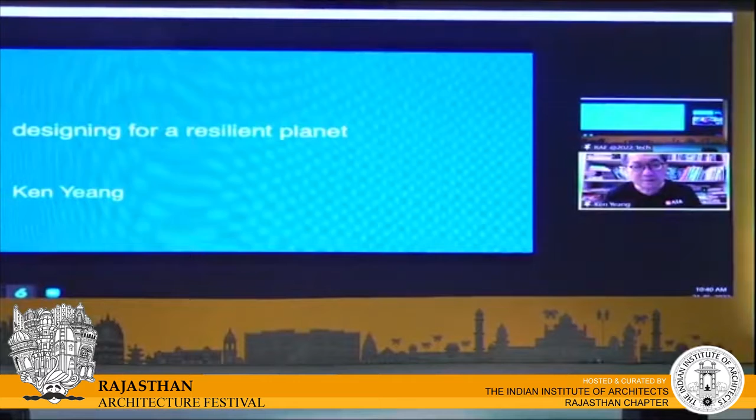Let me just dive into what I'm going to present to you today, which is the topic of designing for a resilient planet. It's such a complex topic that I am not able to do it comprehensively, so most of our work are, if you like, experiments that seek to advance the field of ecological design.

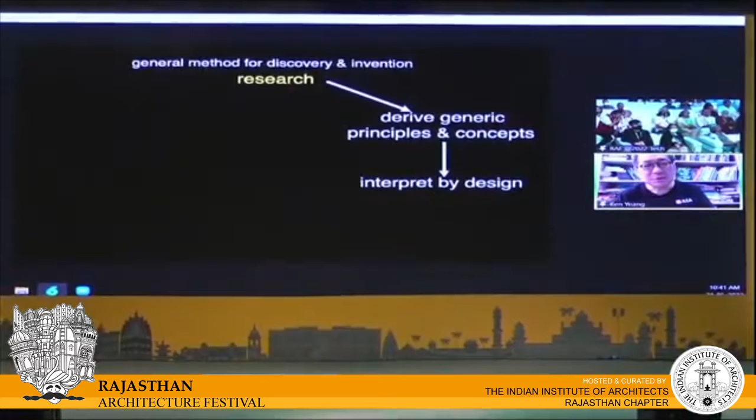This is our general method, what I call discovery invention. Our work is research-based, and from the research we derive generic principles and concepts, which we then try to interpret by design and get it built. From there we evaluate, discover, and advance principles, getting feedback that allows us to further develop generic principles and concepts, which we publish and seek to improve through further research.

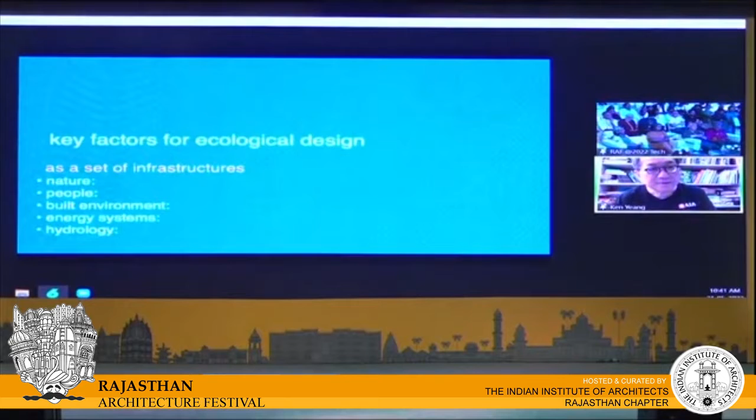The key factors for ecological design, for me, are a set of infrastructures. These infrastructures are fivefold: nature as an infrastructure, people and society as an infrastructure, our built environment as an infrastructure, our energy systems, and the hydrology of the environment. I'll explain why these factors matter in my presentation later on.

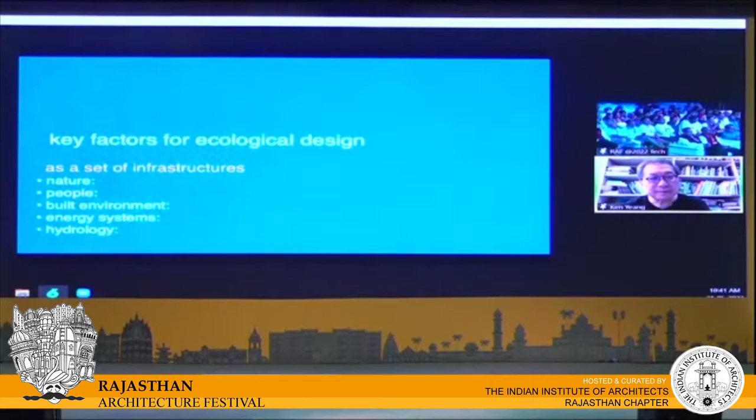And the objectives of each of these are trying to achieve net positive ecological impact, net well-being for society, net zero water, net zero waste and emissions, and renewable energy, net zero carbon.

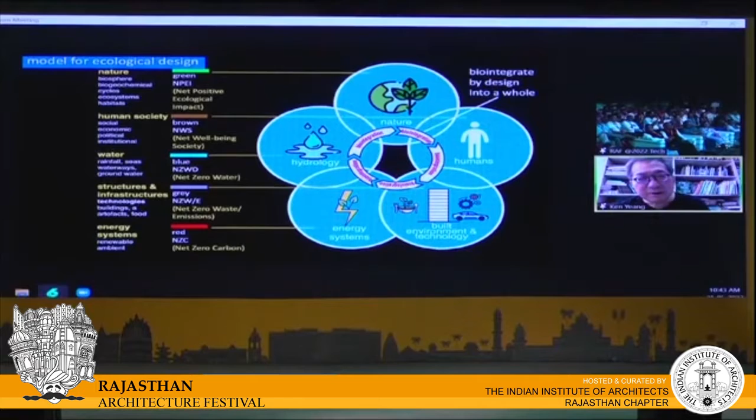The challenge then is how we can bring all these together into a whole. And this is what ecological design is for me. I haven't been able to achieve this 100%, but I try, and it's a continuous experiment and endeavor over our work.

So now the first factor that I want to bring to mind is ecocentricity, which is designing the built environment based on the science of ecology. The reason is that ecology is the baseline context for everything that takes place on the planet.

And because the ecology of the planet is interconnected, we have to start with this as the basis for everything that we do and all our activities on the planet.

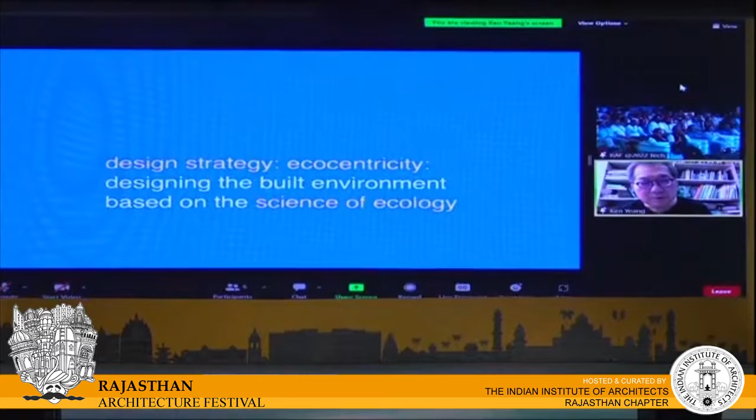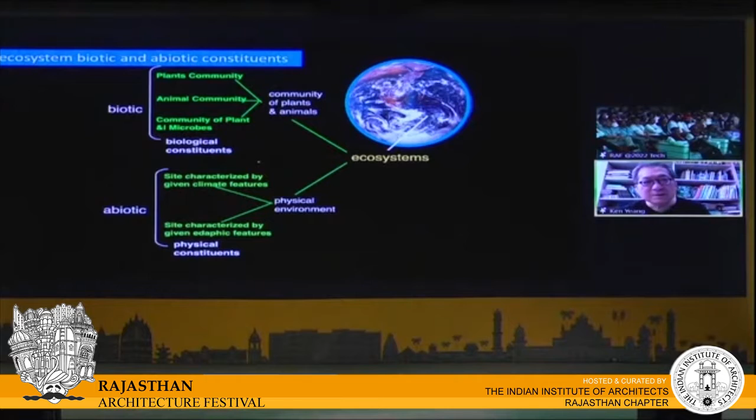Now, ecology sees the Earth as covered by this thin film called the biosphere. And within the biosphere are units in nature which ecologists call ecosystems, consisting of biotic and abiotic constituents, communities of plants, animals, and the physical environment acting together to form a whole.

But to add to this is our human society. Our human society is part of the communities of plants and animals, but we are special, we're different from all species in nature because we are the most powerful of all species.

We can change the landscape, we can change the waterways, we can change the biogeochemical cycles, we can change climate, and now the world is in an environmental crisis, and we don't have very much time to rectify and recover our planet. So it's an urgent endeavor.

Now, of course, if you tell businessmen, you tell the commercial world, they'll say, why should we design ecologically? Why should we design for the planet? Frankly speaking, earnestly speaking, it is extremely difficult to give a commercial justification for ecological design.

And we do it because it is an ethical thing to do. We do it because we have to make sure the planet continues in a good state, in a good condition for future generations. Now, of course, if we don't, then our human society may not be able to perpetually continue.

But nature doesn't care. Nature says, you human beings, you kill yourself, you hurt yourself, but we'll continue, we will recover over time. But why do we need to design ecologically? We have to design ecologically because we want to continue and be sustainable.

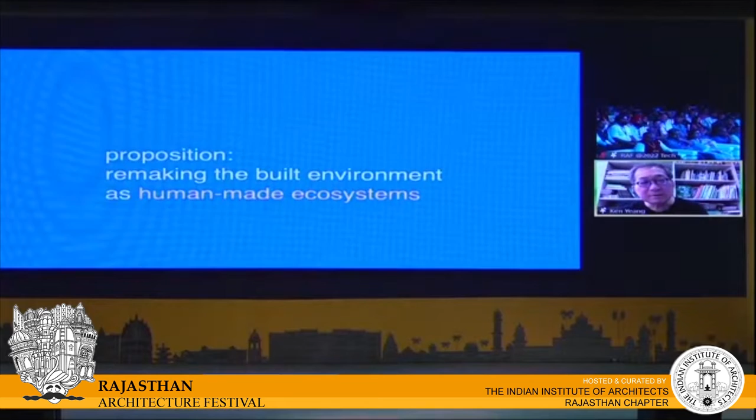This is at a crisis. And so the proposition that I want to present to you today, and this is the single most important idea, is that we need to remake our built environment as human-made ecosystems so that it biointegrates seamlessly and benignly with the natural environment. And so that's our physical environment.

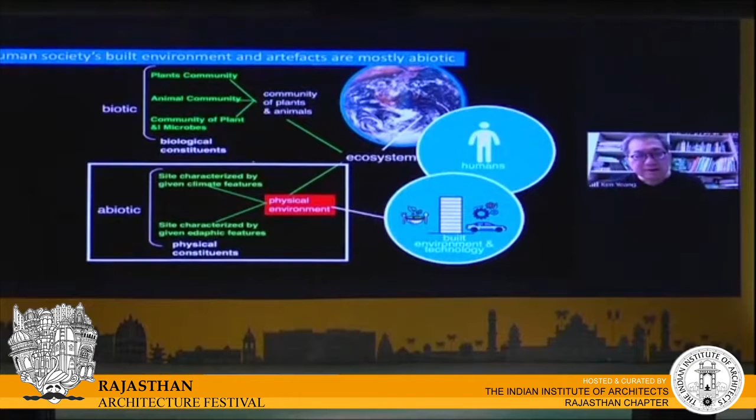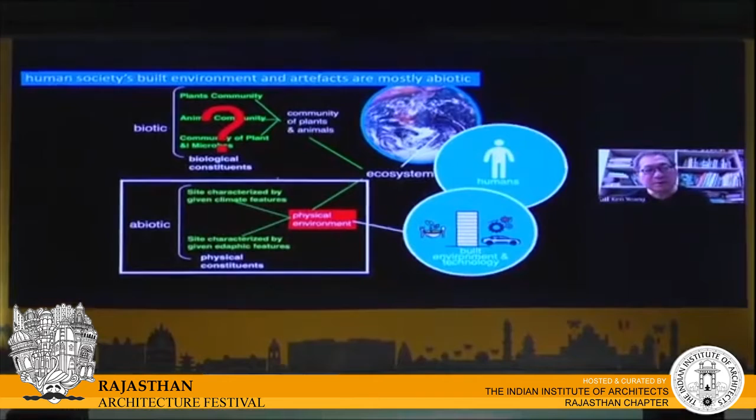Then I started to think, when I first started in this field, that actually our built environment, that everything we make is physical, almost physical, because of course there's landscaping and there's agriculture and there's forestry. And if you look into our built environment, if you look around the room that you're in right now, where are the biotic constituents? The only biotic constituents are you and the bugs in the room.

And so the idea was, can we remake the built environment as human-made ecosystems? And to try and seek to do that, we need to practice what I call eco-mimicry. We have to remake the built environment as human-made ecosystems through emulating, replicating, and augmenting the built environment with nature.

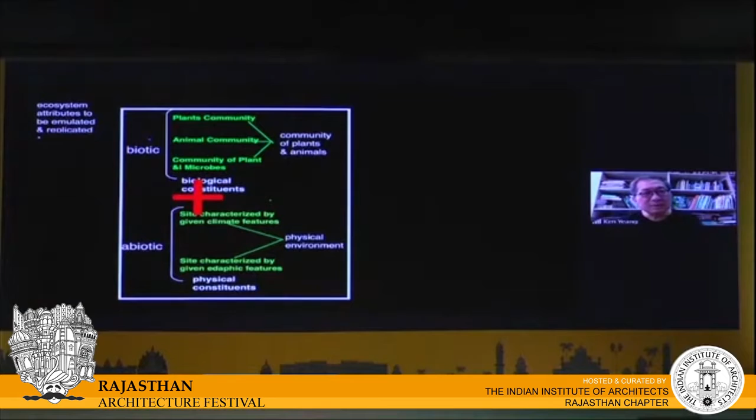And so I started to look at what are the attributes of ecosystems we need to emulate and replicate to make constructed ecosystems. So these are some of them: biological structure, biodiversity ecosystems, connectivity, provision of ecosystem services, and so forth. It is a complex endeavor.

And trying to achieve this in our built environment is extremely difficult. I can only do a very small part of this in my work, but I hope I can achieve as much as I can in my lifetime.

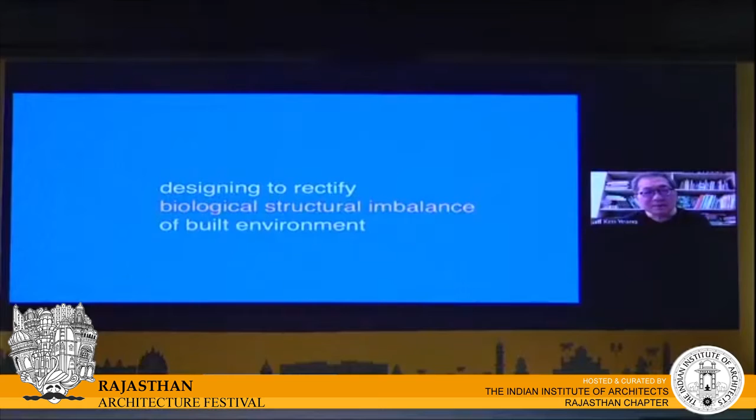So now let's look at the first one, which is ecosystem attribute, which is biological structure in the built environment. As I mentioned, the built environment that we've built is 99% inorganic. Of course, there's landscaping, there are some open spaces, but the inorganic surpasses by far the organic aspects.

So I start to look at patterns in which I can bring greenery into the built environment. I've identified 5 key patterns here. The first one is called centralized, where we put everything in one location, dispersed where we have a spotty pattern. The third is a stepping stone, where we have greenery which is close to each other but not quite connected. The fourth is the spine with fingers sticking out from the spine. And the fifth is a continuous linkage.

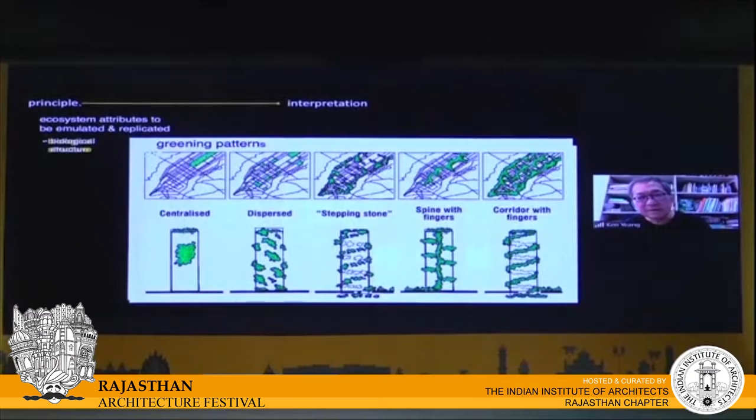The fourth and the fifth are the ideal ecologies because the species and the vegetated areas are interconnected. Interconnected enables species movement, enables greater species diversity, and has a larger pool of resources to be shared among species. It engenders a much more stable ecosystem. And so we should try and achieve the fourth and the fifth in our design as much as possible.

Now, I started putting vegetation buildings back in 1985. And one of the early works is the dispersed pattern. As I said, it's not ideal, but that's how I started. And this was a tower that I did back in 1985, where I put the vegetation on the outsides of the building in a series of sky courts.

And of course, it also became at the same time an exploration of the idea of the low energy passive mode bioclimatic skyscraper. You can see the lift cores and escape staircases are on the hot sides of the building, the east side and west side. But I'll go into this later on.

The building is column-free and from north to south is about 26 meters. So it is ideal for financial institutions, so you don't have columns inside the floor plate.

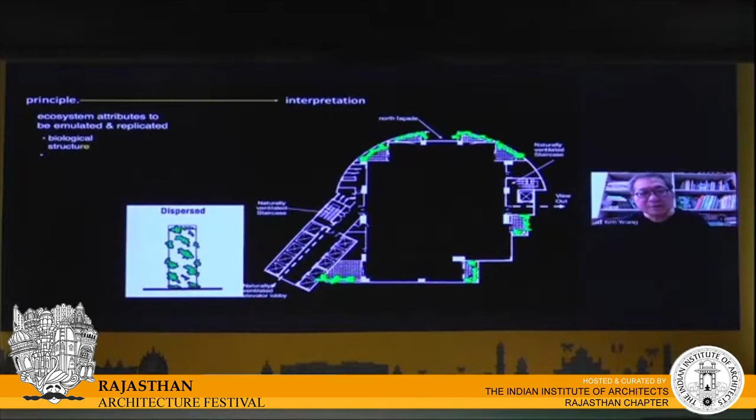Now, what we have done as human beings is that we fragment nature, we fragment the environment. You chop up nature, you chop up the landscape by roads, by drains, by fences, by impervious surfaces. And our designing must try and restore these fragmented ecosystems and try and link them together.

So somebody was asking me, how do we make our cities green? I said the first thing you need to do, without going into technical aspects, is to link all your green areas, because you chop up nature by building your city. Reconnect nature, make nature whole again. That's the first thing you need to do, but not just horizontally.

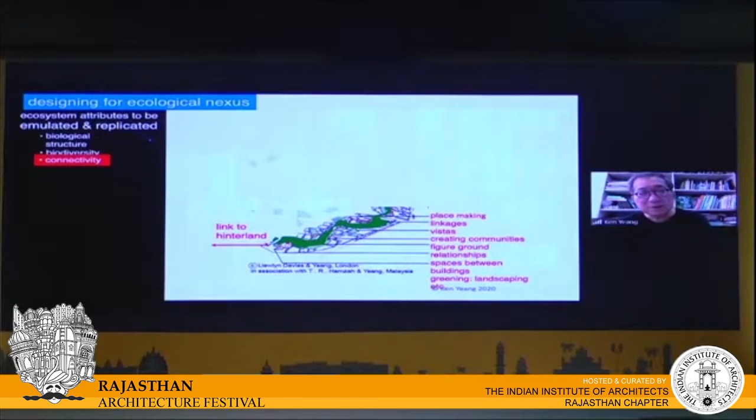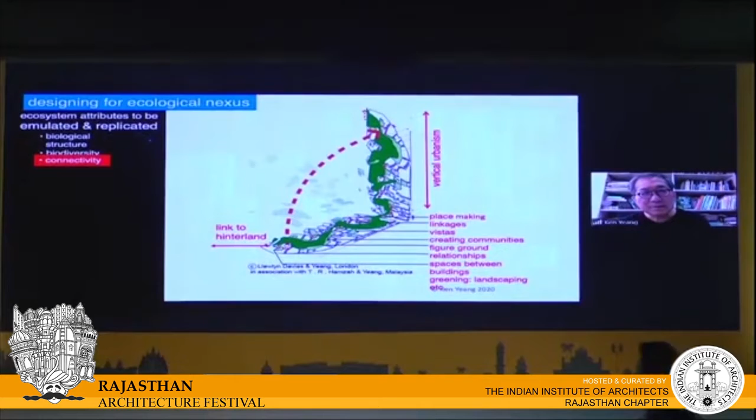We should bring it into our buildings. The idea is that once you do this, our built environment is heading towards a balance of the biotic and abiotic constituents. This was an early project that we designed where we brought the vegetation in a spiraling ramp, spiraling all the way on the outside, right to the top of the building.

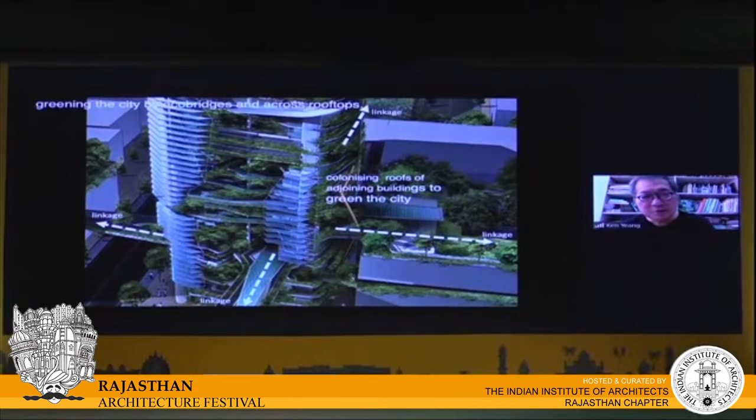The idea was that when the spiral ramp reaches the roof of any adjoining building, we bridge it to the adjoining building and we green the adjoining building. So this was an idea that we could start to make our city, to green our cities, not just horizontally, not just vertically, but also at the upper parts of the building. Of course, this is just an idea. Nobody's taken it up yet, but it is a proposition.

So now connectivity is extremely important. I call this ecological nexus, because this is how we can make nature whole. Nature actually is much more complex than we think it is. You look out your window, all you see is just vegetation. But nature has processes that you and I cannot see, not visible to the human eye. There are animal communities, different species, it makes pure water, there's photosynthesis and so forth.

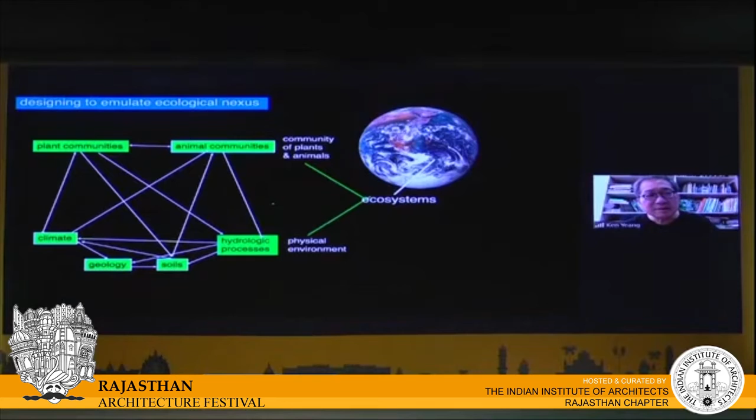So it's important then for architects to understand ecology. It's extremely difficult for me to talk to my colleagues today because 99% of them do not have a background in ecology, and they get annoyed when I tell them they have to study ecology. But it is crucial to save the planet, because then you understand the processes that take place in nature that we cannot see. So back to this diagram and back to the preferred ecological pattern, which is on the right-hand side.

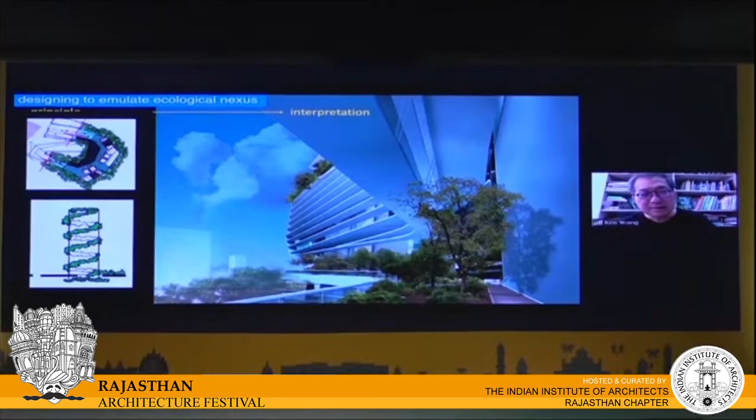We did this building in Singapore where the idea was to bring vegetation up the facade. With every facade, we climb one floor. So the idea was to have a vegetated ramp, and next to the ramp, a walkway, so that you can service the vegetation without going through the user floors, because that annoys the users no end.

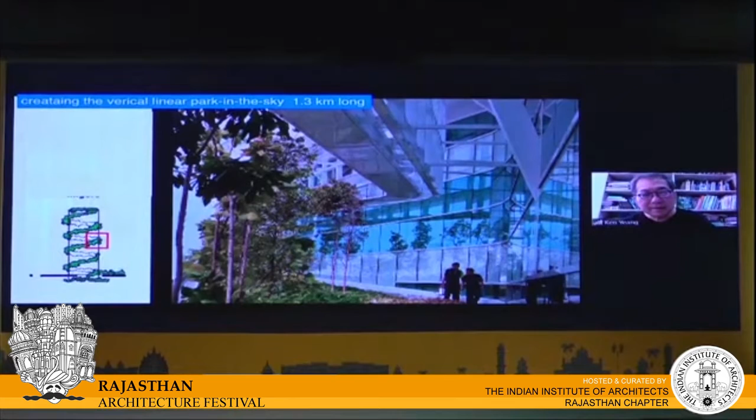It took a while, from 98 to 2005 that we finally got it built. You can see the vegetative zone, which is on the periphery of the building, the walkway, the sun shading, and the curtain wall. So this is the building.

Vegetation climbs every floor, going all the way up. I call this a linear park because it's actually a park, but it becomes very boring if it's all linear. So we articulated, we punctuated the corners with what we call sky courts, so that people going up the linear park can interact with people inside if they wanted to.

The plan is this irregular shape because that's the shape of the site. The master plan of that site, the entire site, was done by the famous Iraqi architect, Zaha Hadid, who died a few years back.

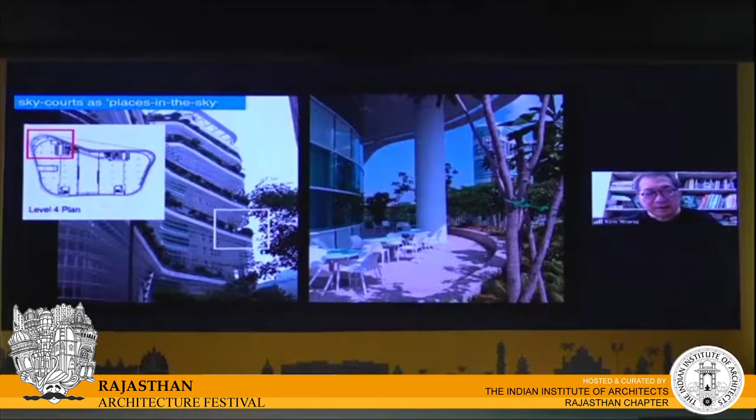The building is actually two blocks, A and B, linked by bridges. In between the two blocks is an atrium. The atrium has a glass roof that brings daylight and ventilation into it. The atrium isn't fully air conditioned; it's just cool air being blown into it, and this reduces the energy consumption of the atrium and the building.

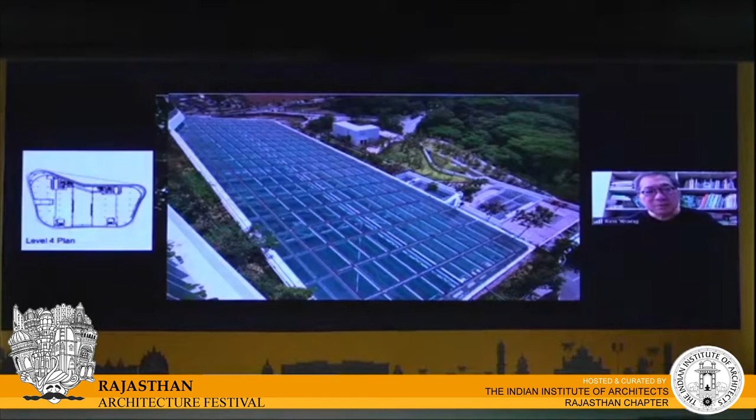This is the glass roof when it's cold, when it's closed, when it's raining. But on a normal day, it is open to let the air out, and it's automated, so that if it rains, the smart building automatically shuts.

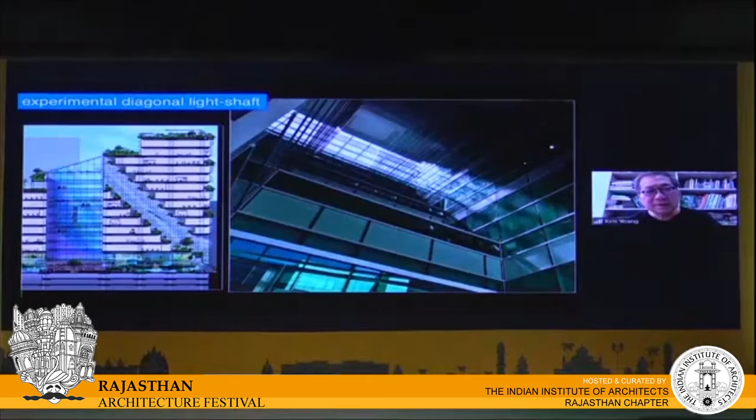Another idea we developed is what we call the diagonal light shaft. On the right-hand side, you can see an image looking up the diagonal light shaft, and you can see the skylight. This is the atrium, and this is looking down a light shaft into the street level. On the street, you can actually look up and look at the upper parts of the building.

One of the attributes we try to incorporate is what we call biodiversity, because nature is biodiverse. We as human beings simplify nature. If you look into most landscapes, we have a very low number of species, and sometimes we even use the wrong type of species. We really mess up the ecology.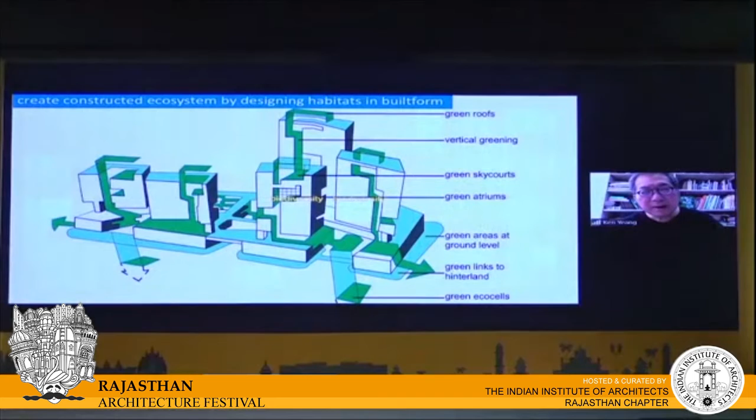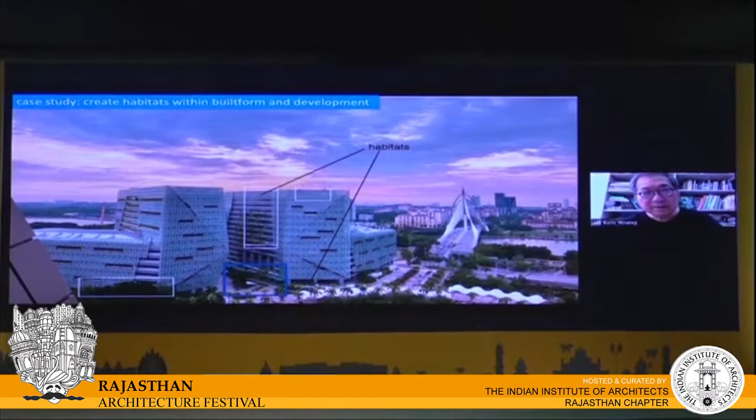The plan is basically two chevron-shaped buildings. You enter from the south, southeast, and southwest, with an atrium in between. The building is 17 stories, and you can see the vegetation on the east side.

Why are there two buildings? It's because there's an axis going all the way down from the plaza at the north, down to the Millennium Monument in the south. So in order to maintain axis, we split the building.

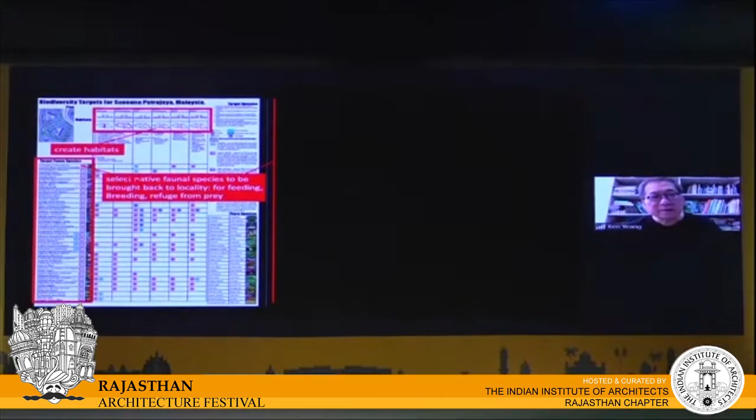So for the habitats, as you can see in this matrix, we do research on what fauna existed in this locality that we want to bring back. Next we identify the fauna we want to bring back, and to attract them, we identify the flora that will attract the fauna. Then we look at the interaction of all these with the habitats, and that becomes the basis on which we design the habitats and landscape areas in the building. We call this the biodiversity matrix approach to design.

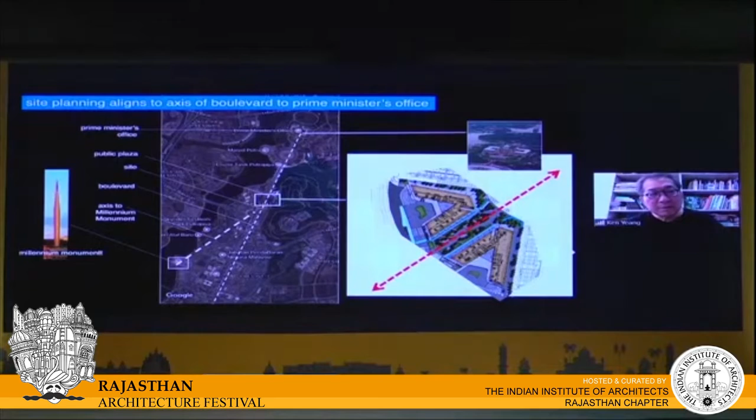Here's the floor plan again. The building is located along the axis. You can see the long axis in the township of Putrajaya, about 20 minutes from Kuala Lumpur, the new capital city. There's also a secondary axis at an angle leading to the Millennium Monument on the left-hand side, which we also designed about 8 years earlier.

Here's the monument with the Ministry of Finance across the waterfront. The water is actually a detention pond, so drainage water goes into it and then filters back into the ground. It's not an expensive lake created for this development, but a natural detention pond. For the building's aesthetic, we wanted to make it something special.

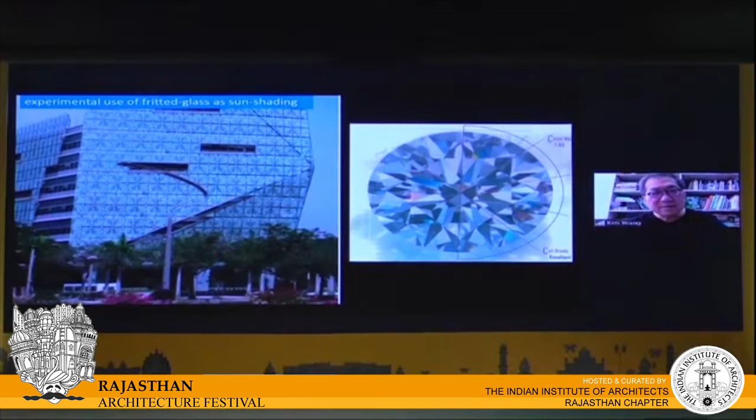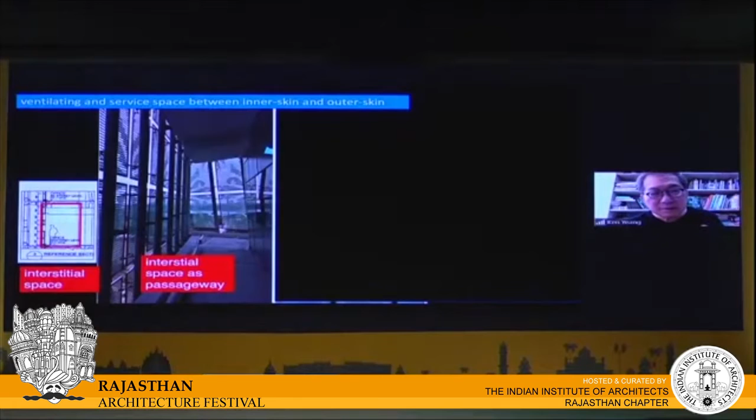It's actually a double skin building. The outer skin is faceted fritted glass, about 50% white frit, with a walkway for servicing, and an inner wall. The fritted glass becomes an experimental substitute for horizontal sun-shading louvres. This is what it looks like from the outside.

The last image shows what it looks like from the inside looking out. The fritted pattern doesn't really obstruct the view extensively, though in some aspects you can see the pattern. The fritted, eccentric fritting is about 50% clear and 50% opaque.

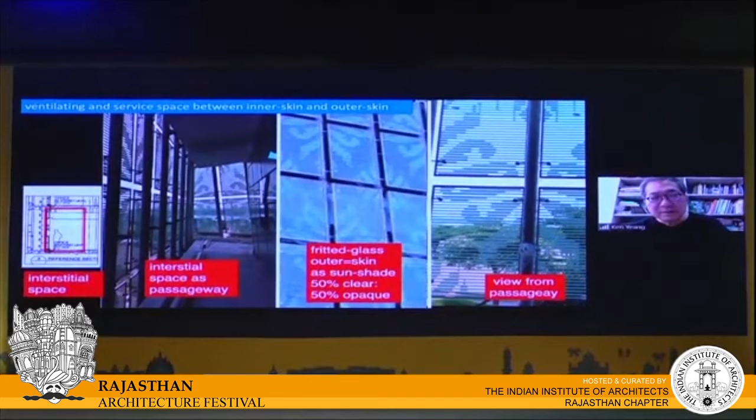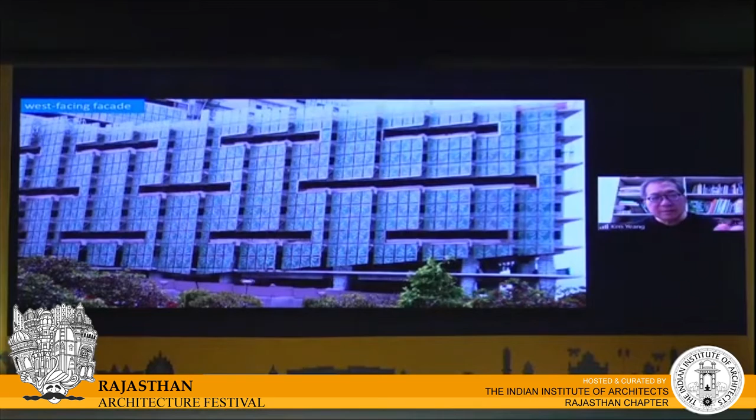On the west side, to represent the hot sun, it is angled. In fact, you could look at the sides of the building and tell where north, south, east, and west are.

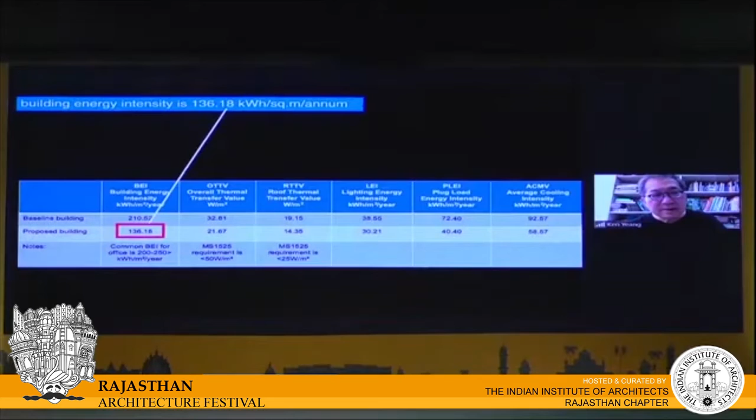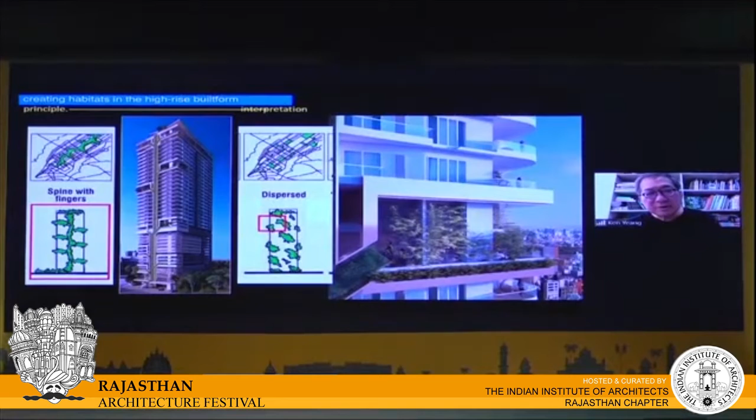Now, how do you address biodiversity in high-rise built form? This is the high-rise building now under construction. We had a spine structure with fingers going out into vegetated sky courts, and this is preliminary research where we look at identifying what species to bring back.

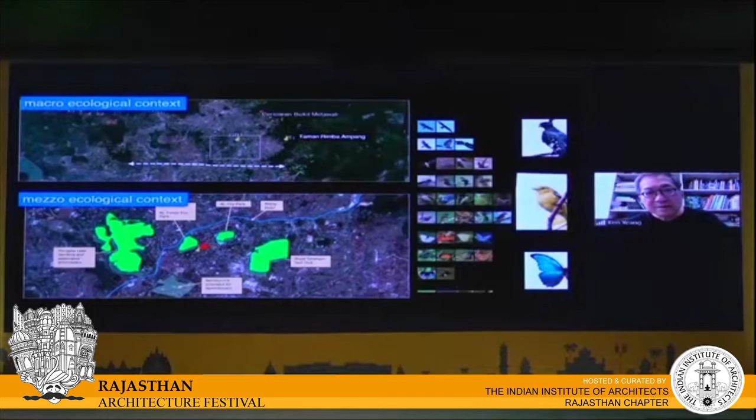The red dot shows where our site is. In this high-rise building we try to bring songbirds, butterflies, and dragonflies, across different zones within the building—this is the biodiversity matrix for that building.

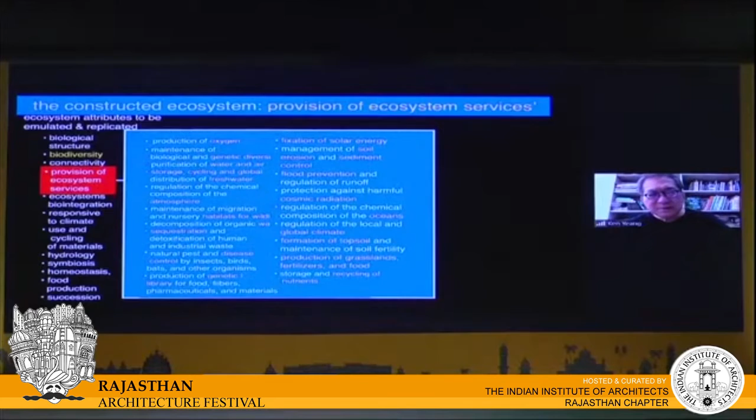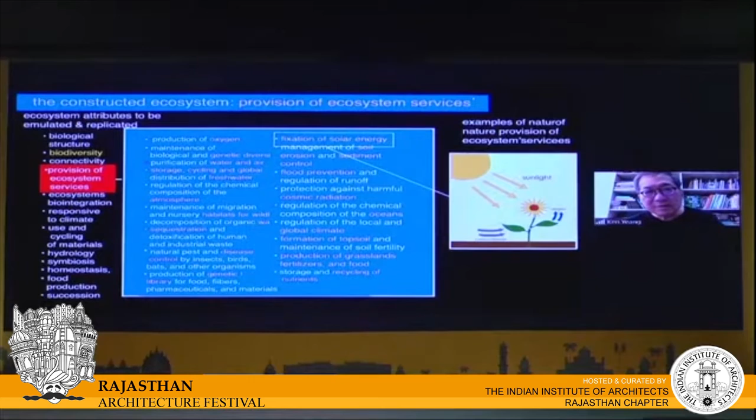One of the ecosystem attributes we want to emulate and replicate is the provision of ecosystem services. Ecosystem services are really complex, so complex and difficult for us to emulate technologically. So do we give up the idea of designing and constructing ecosystems? Things nature does for us include providing ecosystem services such as photosynthesis, solar energy, and sequestering contaminants in the air.

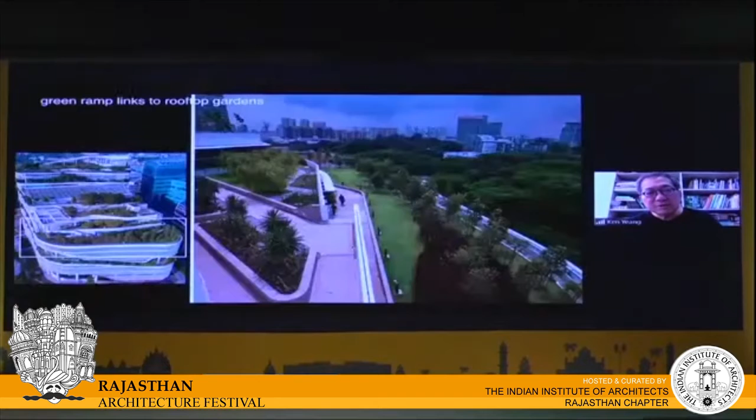With this building, we put as much vegetation as possible into the mid-level roofs and into the uppermost roof. The vegetation ratio required by the rating system is 6, but we achieved double that, 12.2. This is one of the things we try to do to augment the building's capability to provide ecosystem services.

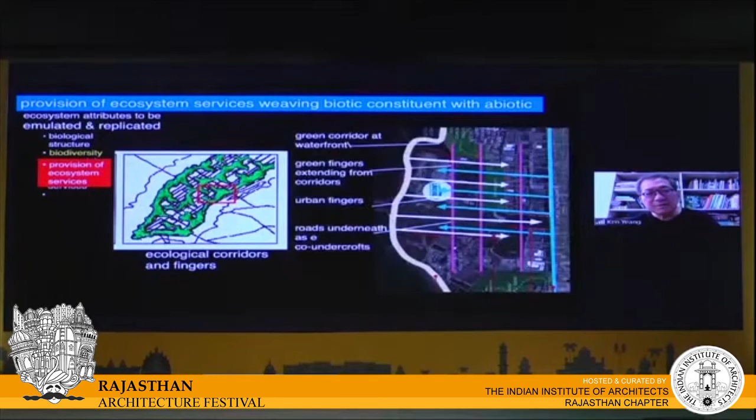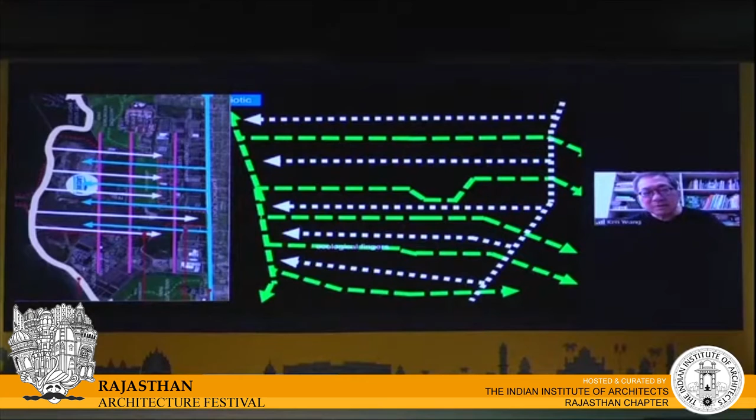Here's an example with ecological corridors, ecological fingers, a scheme we designed in La Reunion, an island east of Madagascar. We try to weave the pattern of green areas and urban built-up areas almost cheek by jowl, so the green fingers provide ecosystem services as close as possible to urban areas. This isn't always possible in an existing city, like London where Hyde Park and Regent's Park are isolated and the rest of the city is built up. This is the scheme we designed for Reunion, with vegetation coming up from the waterfront and green fingers extending down.

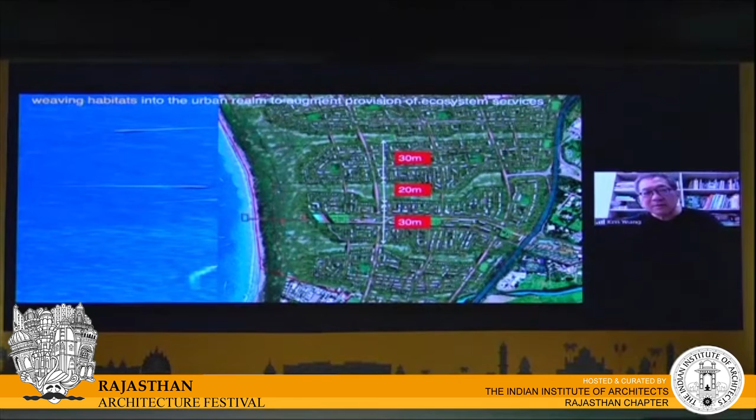This is the master plan, showing the two elements combined. The built-up urban area is about 30 meters, and the green fingers are about 20 meters. The edges should be serrated so species can hide from predators, reproduce, and live with some level of protection from the outside environment.

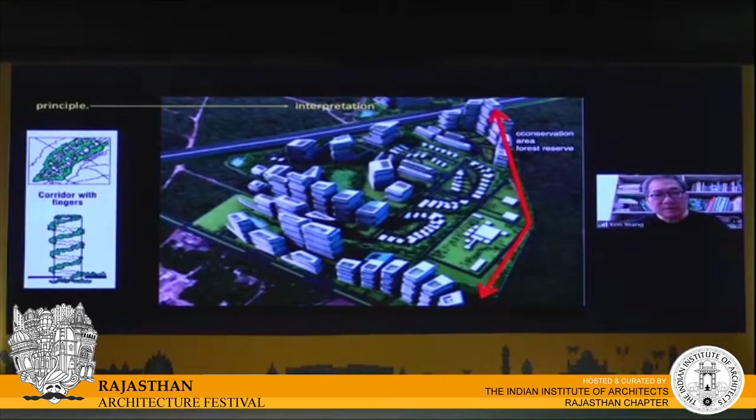With water management, we try to bring water back into the ground as much as we can. This is a master plan we designed in Bangalore, where there's a forest reserve. We collect species from the forest reserve and bring them across the site so they can connect to adjoining areas, with detention ponds to bring water back into the ground.

For the buildings, we try to return and recycle water as much as we can. The black and gray water we cannot use is brought back to the ground through a series of bioswales, detention ponds, and water treatment.

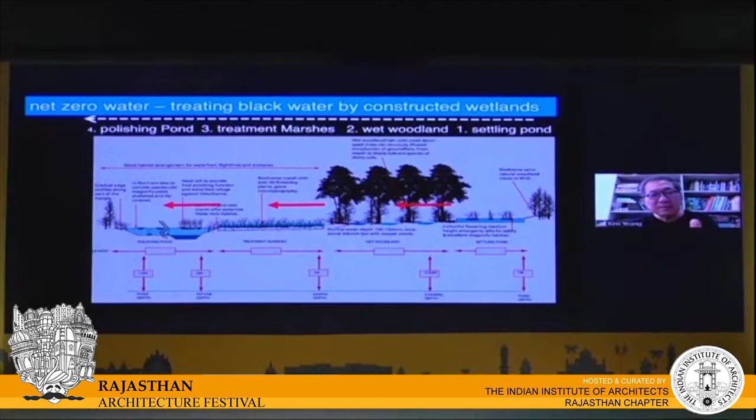Here's an example of what a constructed wetland looks like. There's a series of ponds where black water gets filtered and purified as it heads toward the left-hand side, and by the time it reaches the pond on the far left, it's almost potable.

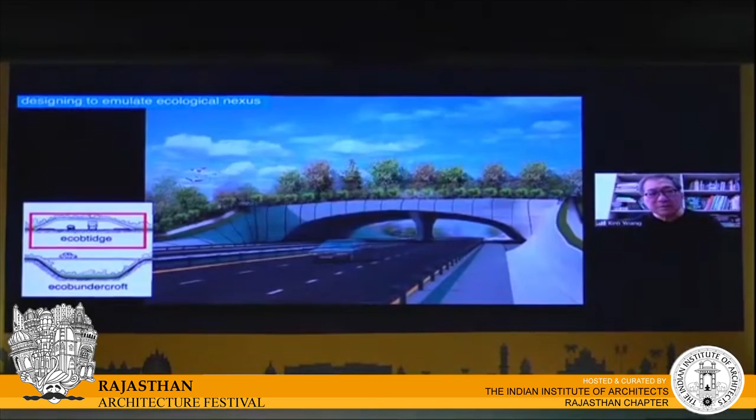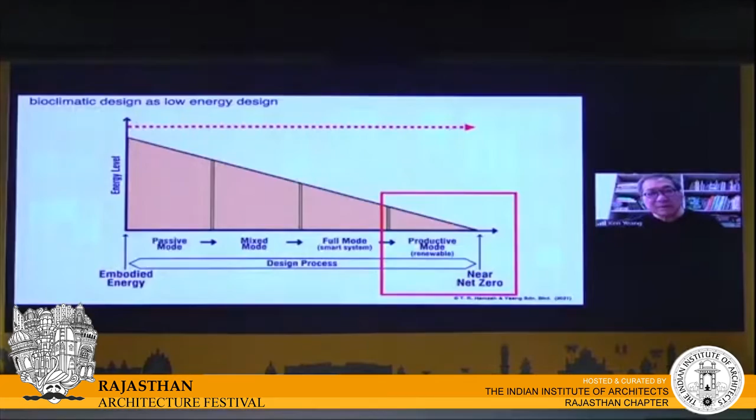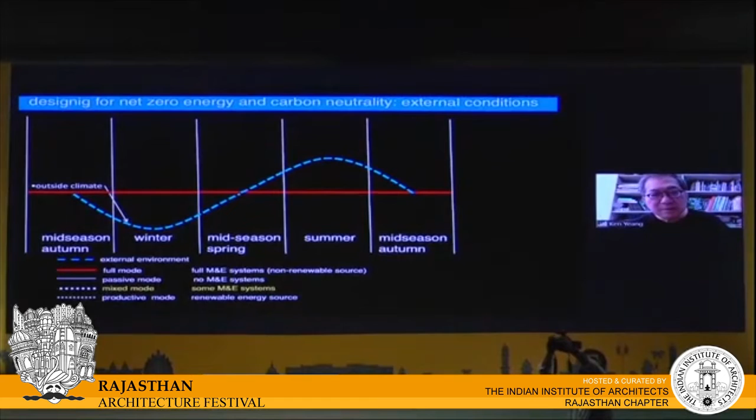If you look at a local site, say north of India, you have a cold winter and a hot summer. Through climatic design—shaping of the building, facade design, orientation—we can improve comfort conditions to some extent. That's the first stage in designing with nature.

The next stage is mixed mode, where we use some mechanical and electrical systems. Finally, we use productive mode, where we use renewable sources of energy. That's the overall approach to designing low-energy buildings.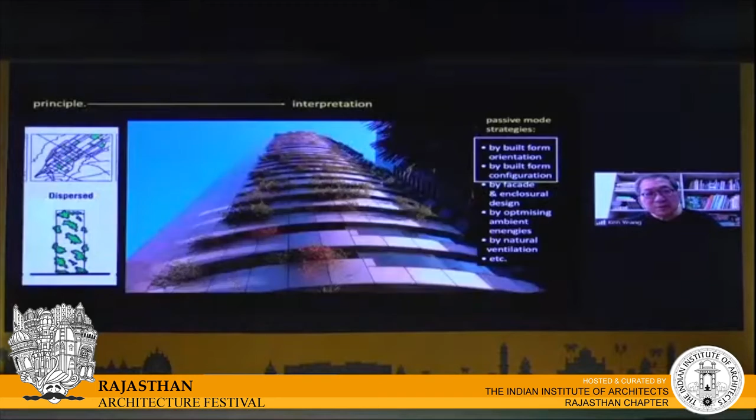Passive mode means, as shown on the right-hand side, building orientation, configuration, and facade design, optimizing ambient energies through natural ventilation and so forth. With this building shown earlier, we studied different core positions and orientations. As you can see on the left, cores on the east and west sides give the lowest energy consumption, acting as buffers between outside and inside.

For passive mixed mode, one of the ways we provide protection is through what I call a canopy building.

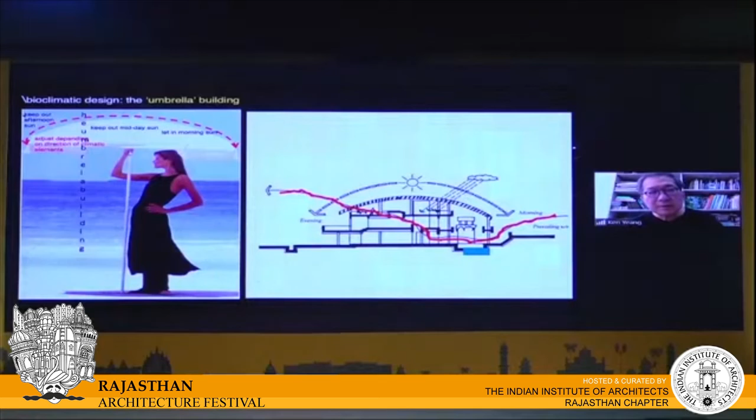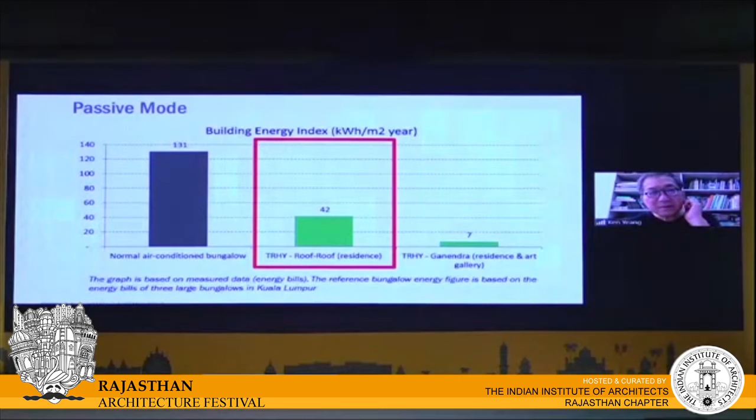And I call this an umbrella building. This was the house we did back in 1985, where we had a louvered roof that brings in daylight into the east side and keeps out the sun at midday on the west side. It uses 42 kilowatt hours per square meter per annum, whereas 131, which a lot of houses use, is the typical amount.

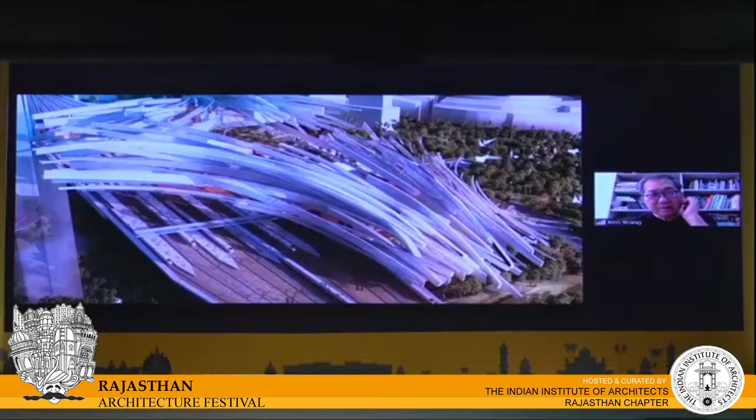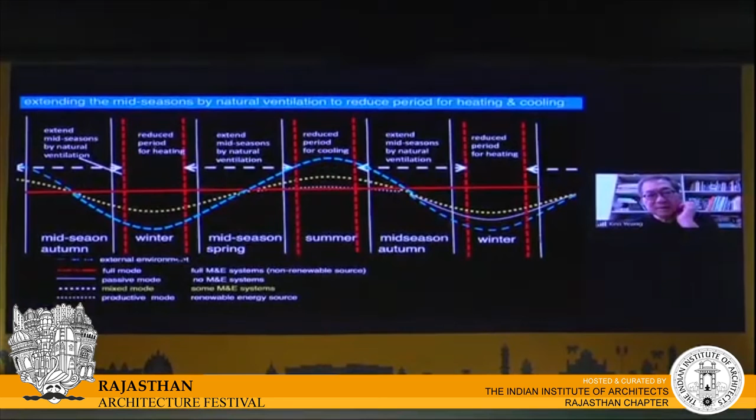Now, in between is mixed mode, where there are some mechanical and electrical systems. The idea of mixed mode is to try and extend the mid-seasons of spring and autumn into the winter and summer months, to reduce the need for air conditioning and heating.

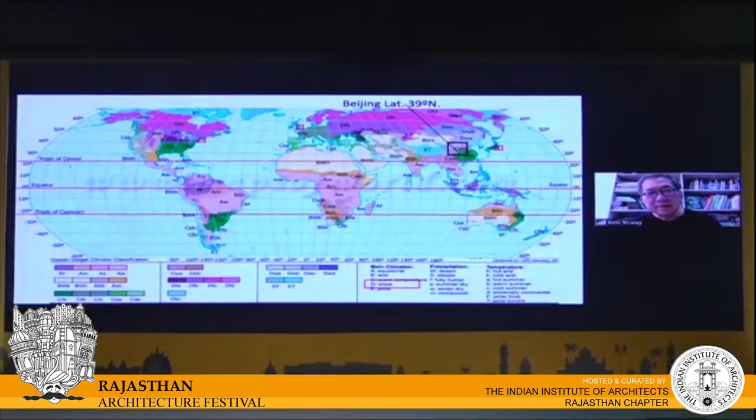And we did the same thing with this project in Beijing, which is about 39 degrees above the equator. We renovated the building so that we could bring—

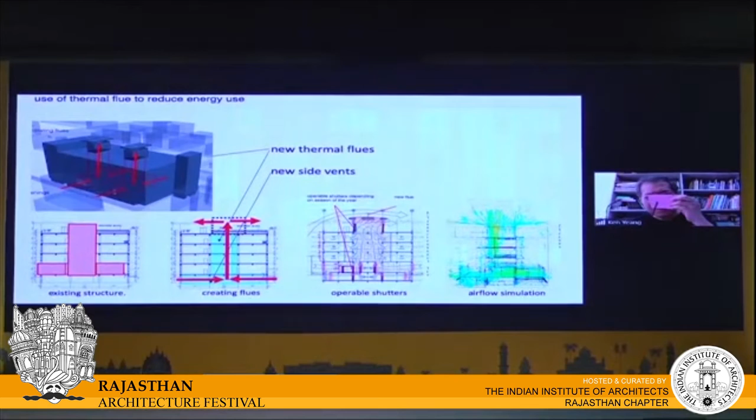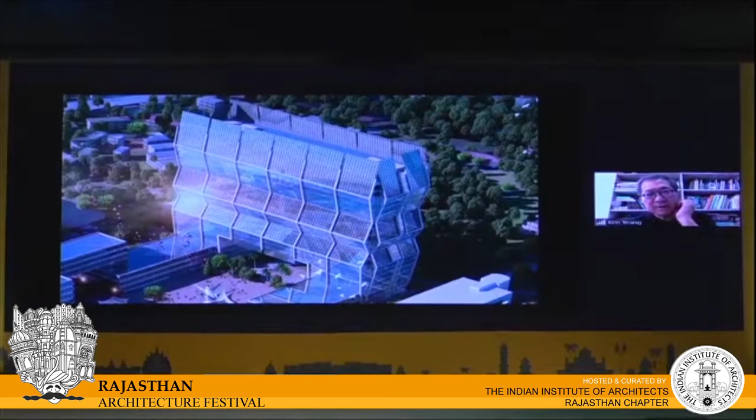Another idea was to put embedded photovoltaics in the glass of the building, so the whole building becomes like a power plant.

And for net zero waste, we try and recycle everything back into the built environment, or integrate it back into the natural environment.

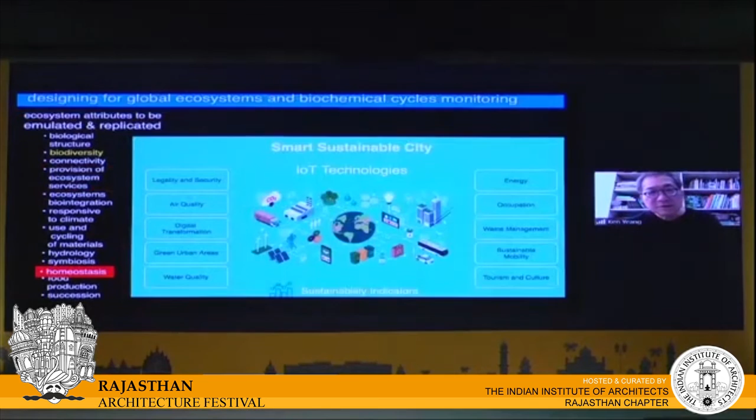For regulation of chemical composition, we try to recycle material as much as possible. We use GPS to identify which parts of the planet are affected, and we take immediate action. For human society, we try to design for enhanced wellness and well-being.

Before I end, I want to talk a bit about this diagram, because ecological design is not the responsibility of just architects, engineers, and designers. It is the responsibility of us as human beings.

So now, if you ask yourself: what if we get everything right? We design properly with nature, we design with water management, we design structures which have minimal waste, and we design renewable energy systems. What if we as human beings do not behave ourselves?

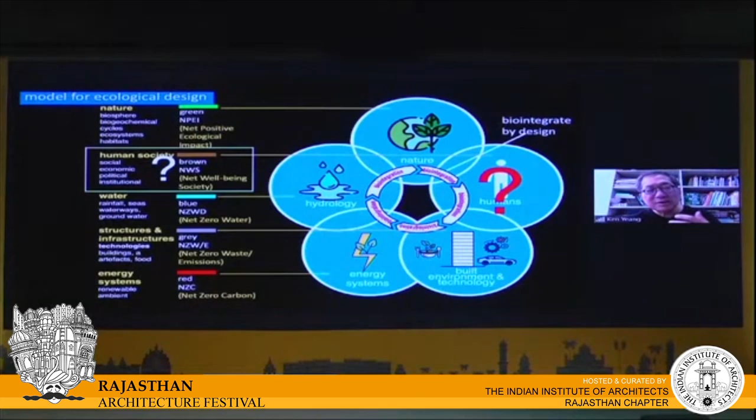We have the wrong diet, we have wasteful energy, we waste water, wasteful materials. So ecological design is not just us, not just engineers, but society as a whole.

So the key principles I presented today are: ecocentricity, designing based on the science of ecology; and ecomimicry, remaking the built environment as human-made ecosystems by emulating and replicating ecosystem attributes. Thank you very much.